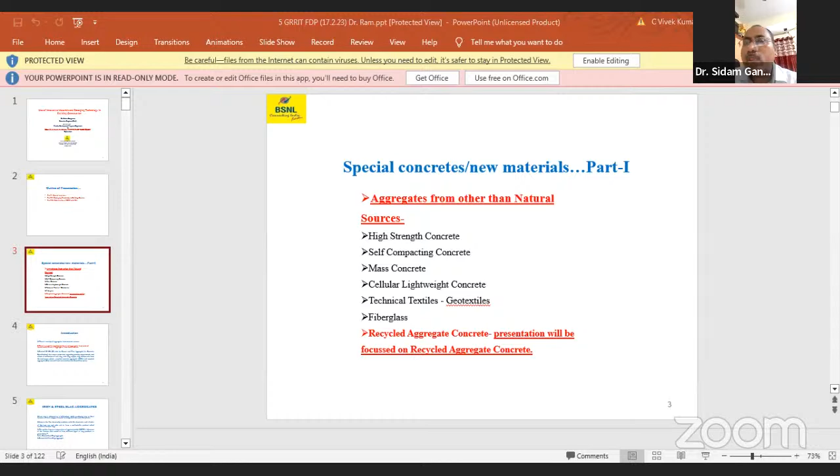Next, about special concretes and new building materials, part 1: aggregate from other than natural sources, high strength concrete, self-compacting concrete, mass concrete, cellular lightweight concrete, technical textiles, geotextiles, and fiberglass. Finally, I am going to focus on recycled aggregate concrete, as I have done research on this topic.

Next, introduction. There is a scarcity of aggregates from natural sources. There is a need to supplement the use of aggregates from natural sources with aggregates from other sources. The revised IS 383 for coarse and fine aggregate concrete also covers provisions regarding quality requirements and extent of utilization of iron slag, steel slag, copper slag, bottom ash from thermal power plants, and especially recycled aggregates sourced from construction and demolition waste.

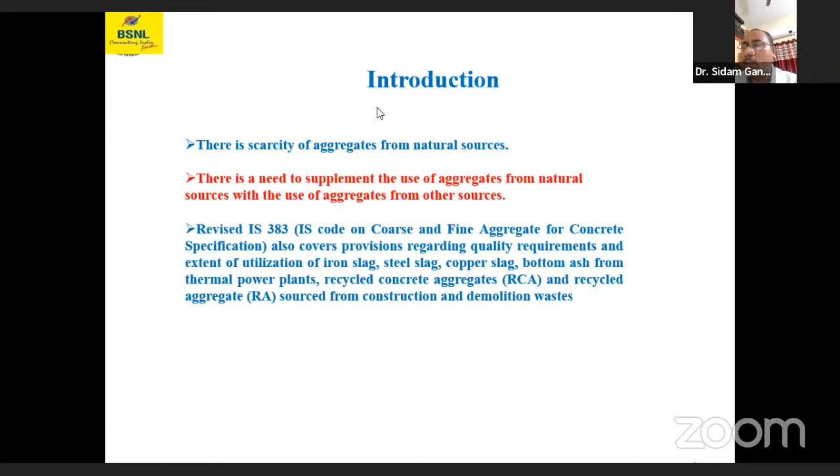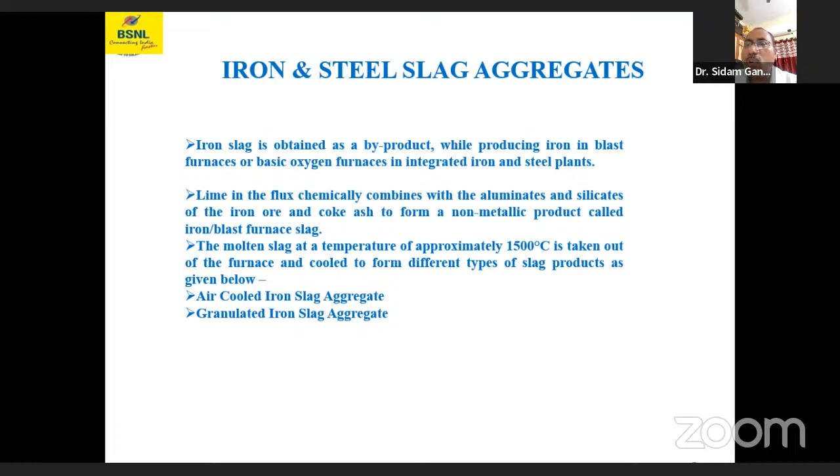Next, iron and steel slag aggregates. The iron and steel slag is obtained as a byproduct while producing iron in blast furnaces or basic oxygen furnaces in integrated iron and steel plants. Lime in the flux chemically combines with aluminates and silicates of iron ore and coke ash to form a non-metallic product called iron or blast furnace slag. The molten slag at approximately 1500 degrees is taken out of the furnace and cooled to form the slag products given below: number one, air-cooled iron slag aggregates, and next, granulated iron slag aggregates.

About steel slag aggregate. Steel slag aggregate is a byproduct of steel making operations in integrated iron and steel plants. Calcined lime used as a flux combines with silicates, aluminates, magnesium and manganese oxides and ferrites to form steel furnace slag. Slag is poured into a cooling yard from the furnace at about 1400 to 1700 degrees Celsius and cooled by air and water. It contains about 10 to 20% metallic iron by mass, to be recovered by magnetic separation. This metal-free slag is then crushed and screened to different sizes for use as required.

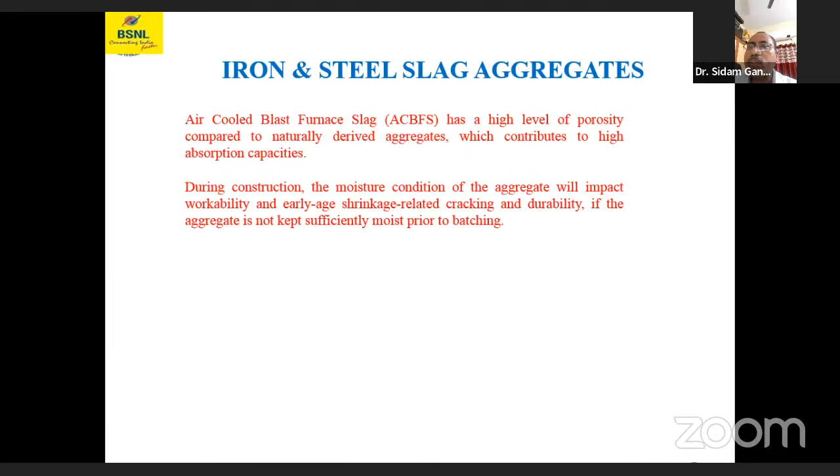Air-cooled blast furnace slag has a high level of porosity compared to naturally derived aggregates, which contributes to high absorption capacities. During construction, the moisture condition of the aggregate will impact workability, early age shrinkage related to cracking, and durability, if the aggregate is not kept sufficiently moist prior to the batching of the concrete.

Next, copper slag as aggregate. Copper slag is produced as a byproduct from a copper smelter in the process of smelting. Iron present in the copper concentrate combines chemically at 1200 degrees Celsius with silica present in the flux materials, such as river sand or silica and quartz fines, to form iron silicate, which is the copper slag. The copper slag thus generated is quenched with water to produce granulated copper slag.

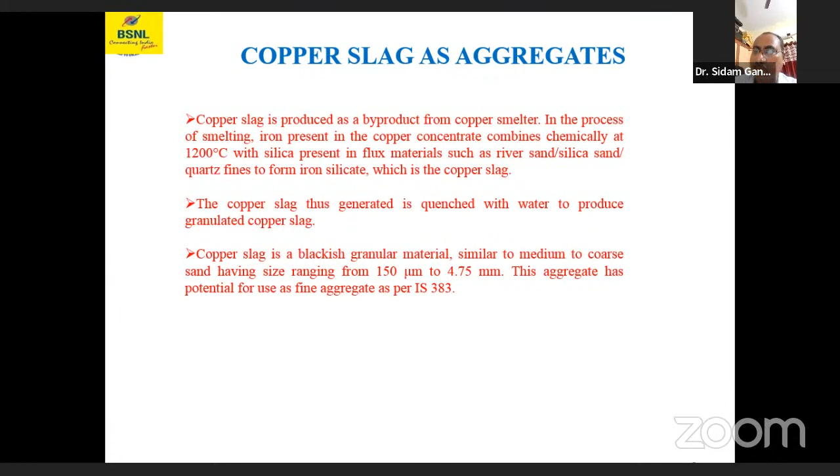Also, copper slag is a blackish granular material similar to medium to coarse sand, having size ranging from 150 micrometers to 4.75 millimeters. This aggregate has potential for use as an aggregate as per the IS 383 codal provisions. Here, the volumetric expansion ratio should not exceed 2% when tested as per IS 383.

Next, unsoundness due to free lime. If the number of particles containing free lime exceeds 1 in 20, then weathering of the slag shall be continued till further testing shows that the level has fallen below 1 in 20.

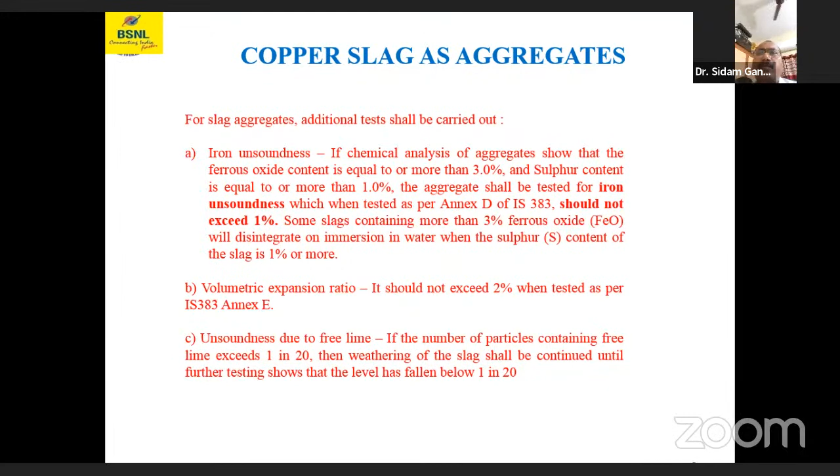Next, extent of utilization. Here, fine and coarse aggregates are there. In coarse aggregate, iron slag, steel slag, recycled concrete aggregate, and recycled aggregate. These are the coarse aggregates. Here, in plain concrete, 50% is allowed, and in reinforced concrete 25%. For lean concrete, we can use up to 100% iron slag.

Whereas for recycled concrete aggregate in coarse aggregate, for plain concrete, up to 25%, and for RCC up to 25 grade, 20% only. For lean concrete, up to M15 grade, 100%. Similarly, for fine aggregate, iron slag, the percentage used for plain concrete is 50%, and similarly for RCC, 25%, and for lean concrete, 100%.

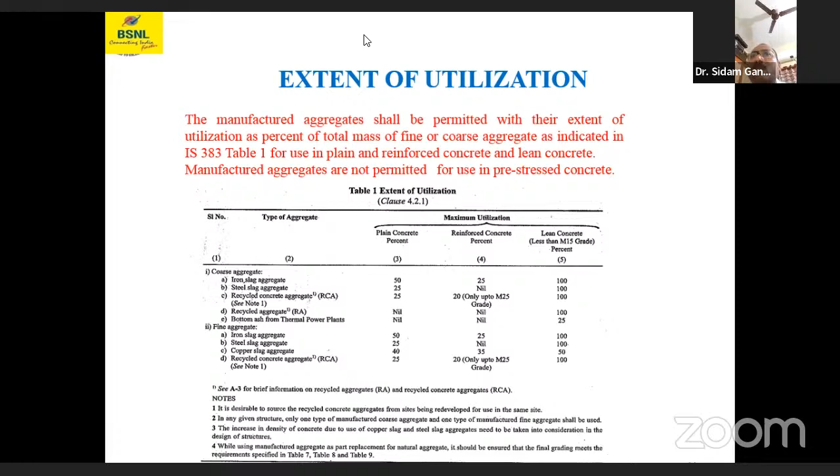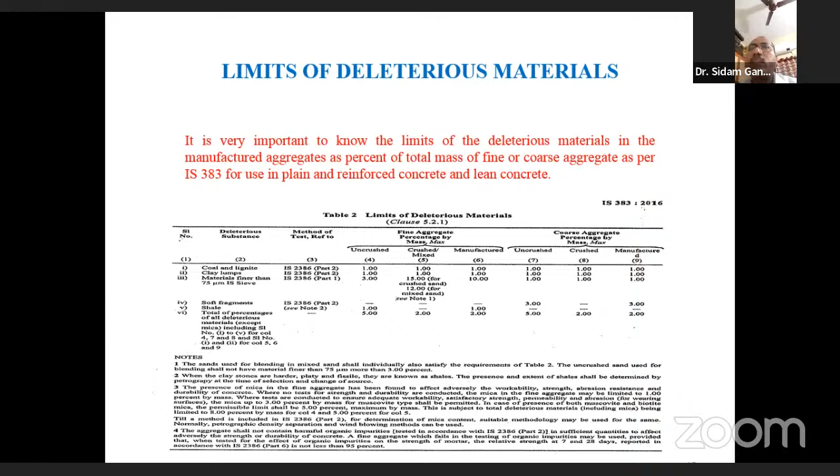So next, about high strength concrete. You all know very well about high strength concrete, but I want to throw some light on it also. High strength concrete is concrete of compressive strength 65 MPa or above. For high strength concrete mixes, specially selected cementitious materials and chemical admixtures, that is superplasticizer, are used, and achieving a lower water-cementitious material ratio is also considered. It is very essential to achieve high strength concrete.

Optimum proportions shall be selected considering the cement and other cementitious material properties, aggregate quality, aggregate gradation, paste volume, admixture type, dosage, and mixing. For any concrete, selection of material is very important. Quality of material is very important. Proper selection of type of cement is also important. Normally 53 grade is used, and fly ash, silica fume, GGBS, or metakaolin are other ingredients in high strength concrete.

Here, fly ash is abundantly available. Silica fume is very costly, so silica fume is used only for specialized structures. GGBS is there. If you substitute GGBS for cement, the RCC or plain concrete structures are very durable. Among all, GGBS is the best supplementary cementitious material for high strength concrete.

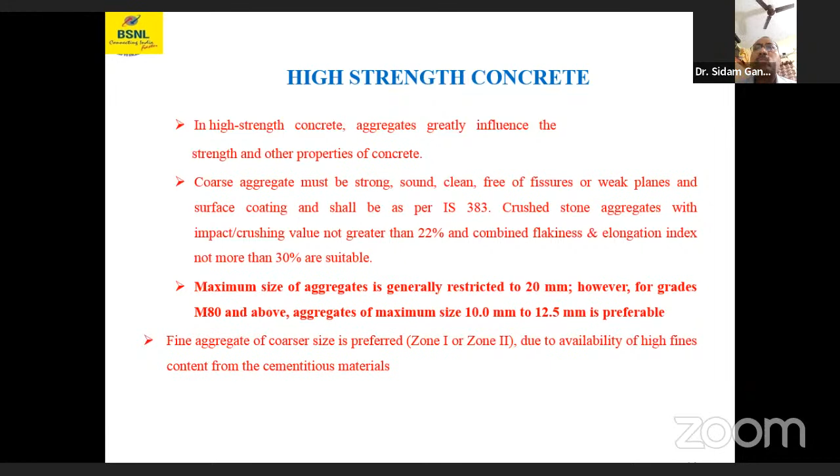Next, the typical dosage of superplasticizer is in the range of 0.5 to 1.5%, and water reduction of 15 to 30% and more can be achieved. The adverse effects in the slump loss, delayed setting time of concrete, and additional air entrapped shall be kept in mind while deciding type and dosage of various admixtures. Sometimes cement admixture incompatibility is experienced. Compatible combinations of cement and SP need to be selected by trials or by simple tests like Marsh cone test.

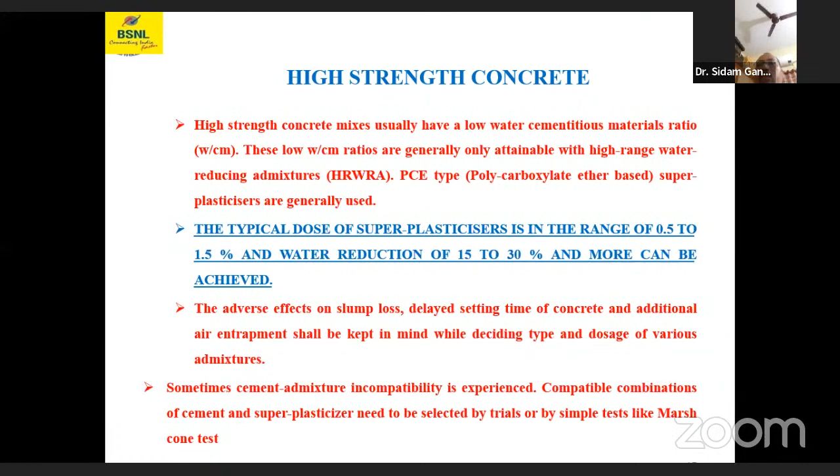Next, about self-compacting concrete. This concrete was innovated in 1988 in Japan by Professor Hajime Okamura. This is widely used in the market. In Hyderabad also, so many skyscrapers are using this self-compacting concrete. Especially in Manikonda, most of the buildings used this self-compacting concrete. Especially Lagadapati's buildings are there, 37 floors. In those buildings SCC was used, and those SCC mix designs were vetted by NIT Warangal.

Self-compacting concrete is a highly flowable, non-segregating concrete that fills uniformly and completely every corner of formwork by its own weight and encapsulates reinforcement without any vibration whilst maintaining homogeneity. SCC is used in both precast and cast-in-situ concrete applications. SCC is used to cast sections with highly congested reinforcement and areas that present restricted access to placement and compaction, construction of tunnel lining sections and the casting of hybrid concrete filled steel tubular columns.

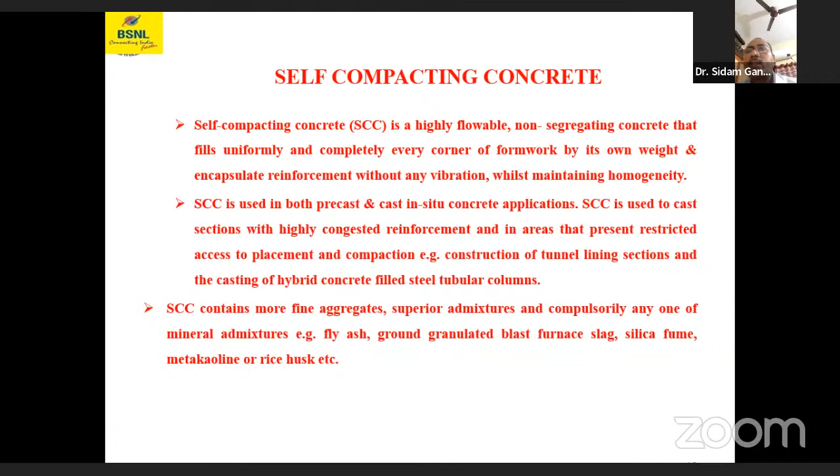SCC contains more fines, superplasticizers, and compulsorily any of the mineral admixtures, that is fly ash, GGBS, silica fume, metakaolin, or rice husk. Fly ash and GGBS are widely used for self-compacting concrete. Generally, from the academic point, if you don't see this self-compacting concrete, we feel that it's something new, but it is equivalent to conventional concrete. We are just adding superplasticizer to improve the flowability. That's all. It is 99.99% equivalent to conventional concrete. We are just adding higher water reducing agents, not more than that.

If you cast cubes, it requires extra time for getting 90% strength. Generally, we test at 7 days and 28 days for the cube test, but it requires an additional 2-3 days. Suppose we want to test the 7 days cube, we have to test those cubes at 10 days. If we require the target strength of 28 days, it requires 2-3 days extra because the use of superplasticizer requires more setting time. So these are the properties.

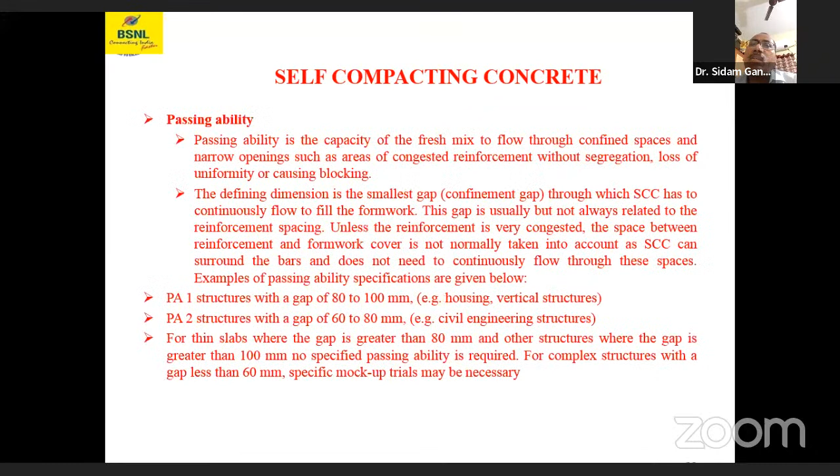M30 and above, cementitious content is 400 to 600. Here I want to mention cementitious content. As per IS 456, the quantity of cement is restricted to only 450. But cementitious content means you can restrict cement to 450, and the remaining 150 you can add as GGBS. That way we also fulfill the codal provisions. Otherwise, for M30, 400 is not advisable. It is very expensive. So when we design the mix, we have to think about the cost of the concrete also.

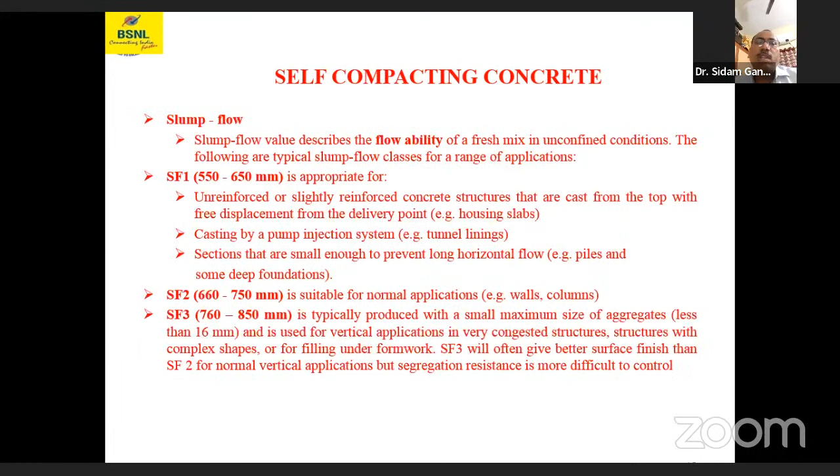Next, this is slump flow 1, 2, 3. These are the codal provisions. Whatever tests we do, those test results have to comply with these codal provisions. This is about self-compacting concrete, passing ability, segregation.

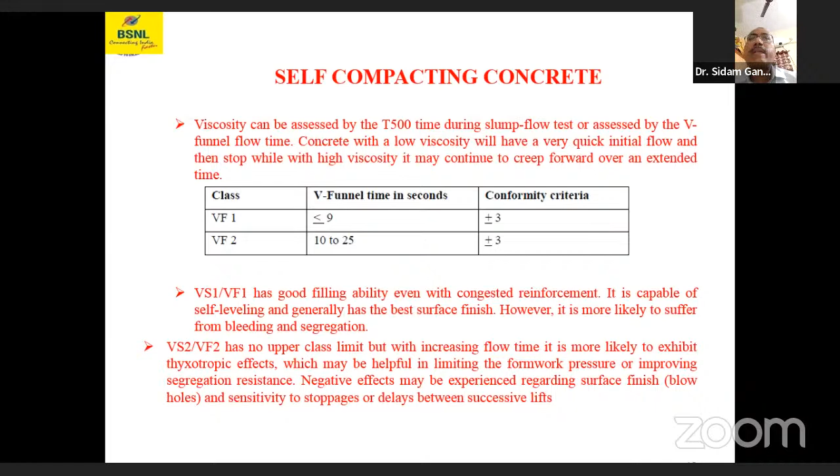Next, mass concrete. Mass concrete is used for structures like dams and other massive structures. Roads also come under mass concrete. For such large structures, measures need to be taken to cope with the generation of heat from hydration of cement and attendant volume change to minimize cracking. The primary objective of proportioning for mass concrete is to establish economical mixes of proper strength, durability, permeability with adequate workability, easy placeability and least temperature rise after placement.

If we do not maintain temperature, cracks will appear immediately after concreting. In mass concrete structures, generally a lower grade of concrete, say M15 or M20, and higher sizes of coarse aggregates are used.

Additional data required for mix proportioning for mass concrete: expected maximum placing temperature, air content range in case of air-entrained concrete, test ages of strength, and so on. In mass concrete, water-reducing admixtures or plasticizing admixtures are effective and usually decrease water content by 5 to 10% at appropriate dosages. The dosage is only 0.5 to 1.5 as per the code 9103.

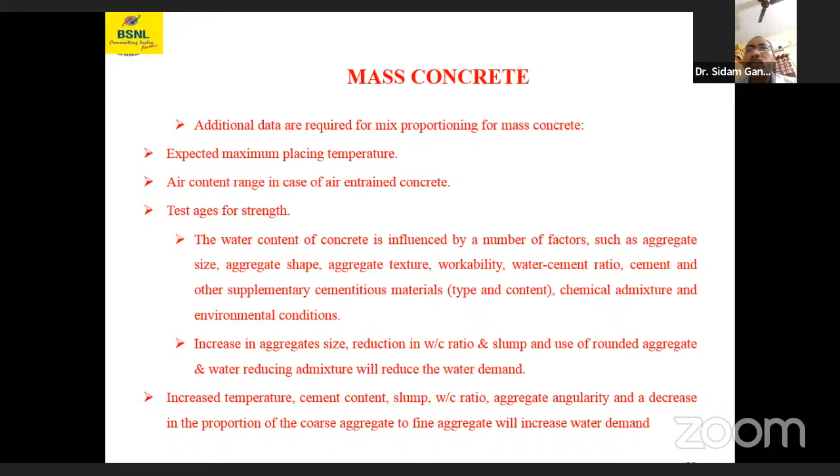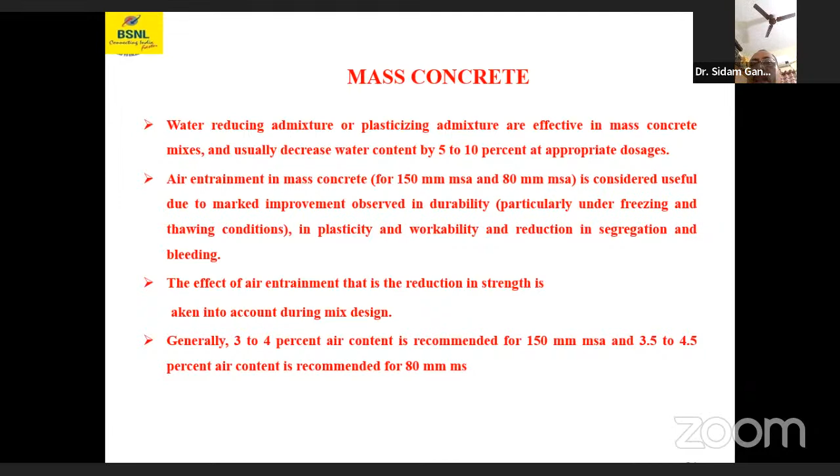Cellular lightweight concrete is a versatile material made up of cement, fly ash, and protein-based foam, mostly used in India for walling purposes as a non-load bearing structural element, which has lower strength than conventional concrete and is popular because of its light weight, which reduces self-weight of the structure. It is a good substitute for ordinary clay bricks, which use high energy and precious agricultural land.

Generally the density of the concrete is in the 22 to 25 range. But for lightweight concrete it is 600 to 1000. There are also micro lightweight concretes, with a density of 300 to 600.

In fly ash based cellular lightweight concrete, the density can be controlled by the introduction of gas or foam by a foam generator. Fly ash can be more than 25%, ranging between 26 to 33% of the solid material constituting CLC mixes for different density outputs. CLC can be produced in a density of 400 to 800 kg per cubic meter with a high insulation value and a 28 days cube crushing strength of up to 275 kg per cm square.

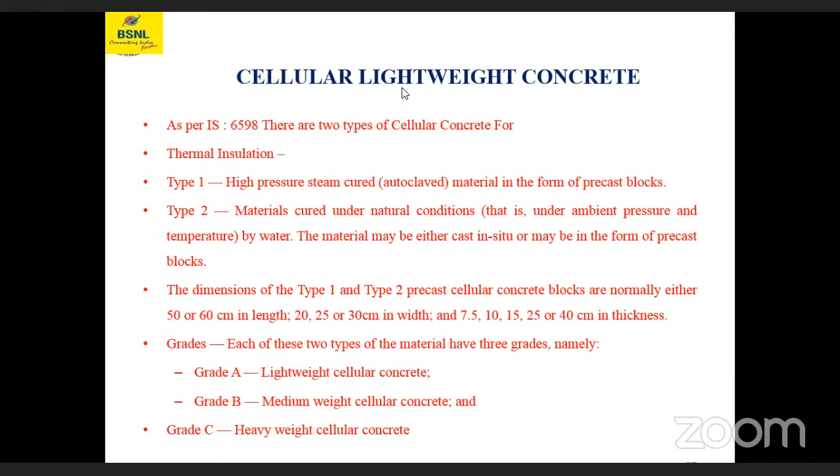It's not visible properly. So about cellular concrete, as per IS 6598, there are two types of cellular concrete for thermal insulation. Type 1, high pressure steam cured autoclaved material in the form of precast blocks. Second, materials cured under natural conditions, that is under ambient pressure and temperature. The dimensions of type 1 and type 2 precast cellular concrete blocks are normally either 50 or 60 centimeter length, 20, 25, 30 centimeter width, and 7.5 or 40 centimeter thickness.

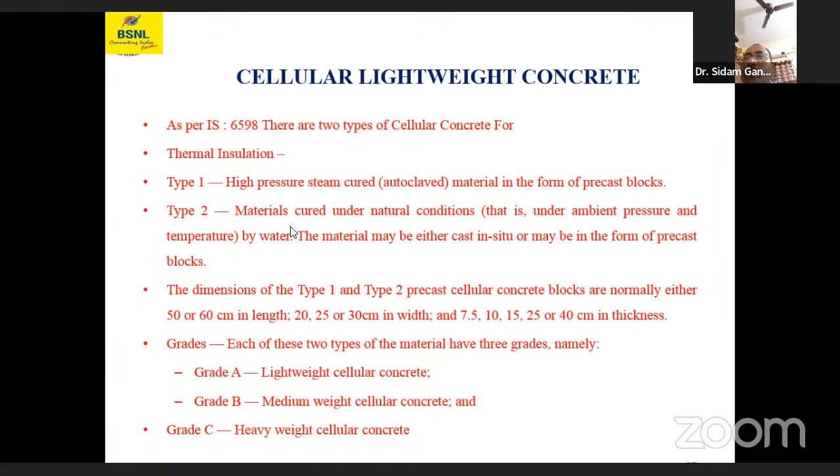In this concrete there are grades: A grade, B grade, and C grade. A grade is lightweight cellular concrete, B grade is medium weight cellular concrete, and grade C is heavyweight cellular concrete. Some requirements of cellular concrete for thermal insulation: density for grade A is up to 320, grade B 321 to 400, grade C 400 to 500. The test reference is IS 5688.

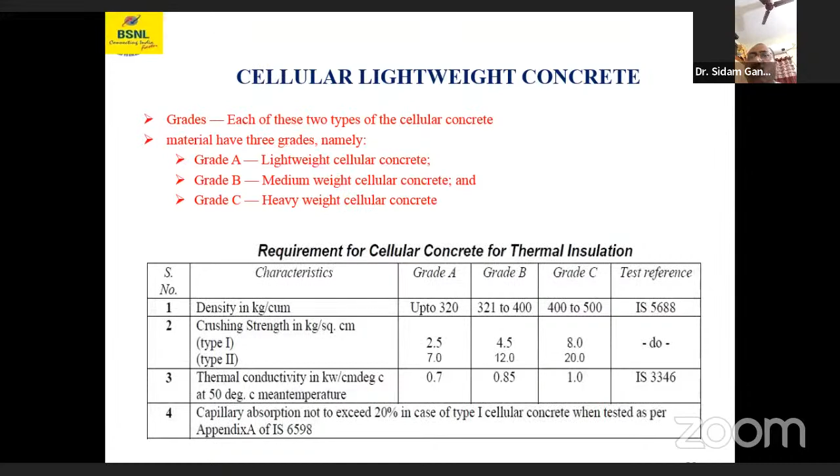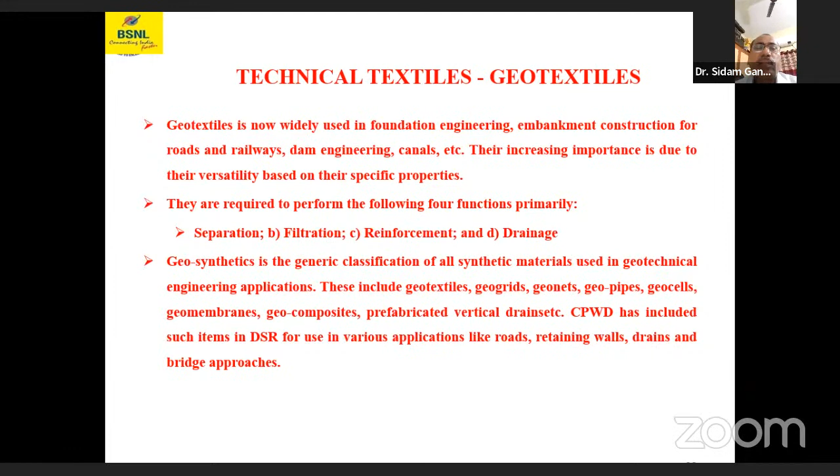So next, fiberglass. Can you change, madam, this up to fiberglass?

Okay. Next, fiberglass is made of extremely fine fibers of glass, formed when thin strands of silica-based or other formulation glass are extruded into many fibers of small diameter suitable for textile processing. Glass fibers are lightweight, having low susceptibility to moisture, high electrical and thermal insulation, mechanical properties, and high impact, corrosion, and fire resistance. Glass fibers can be randomly arranged, flattened into a sheet, or woven into a fabric. Textile glass fibers may be formed from molten glass directly from the furnace.

Glass fibers can be divided into two major groups according to their geometry: continuous fibers used in yarns and textiles, and discontinuous fibers used for insulation or filtration. Fiberglass is a common type of fiber reinforced plastic where glass fibers act as reinforcement. Fiberglass textiles are commonly used as a reinforcement material for molded and laminated plastics, while fiberglass wool made from discontinuous fibers is used for thermal insulation and acoustics.

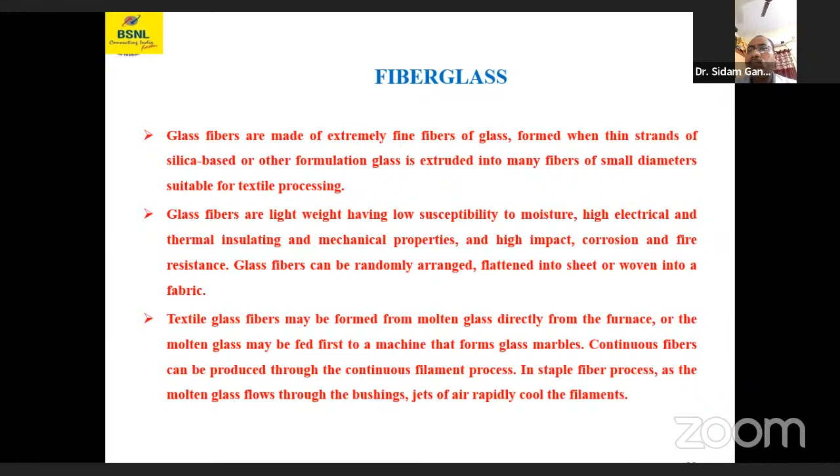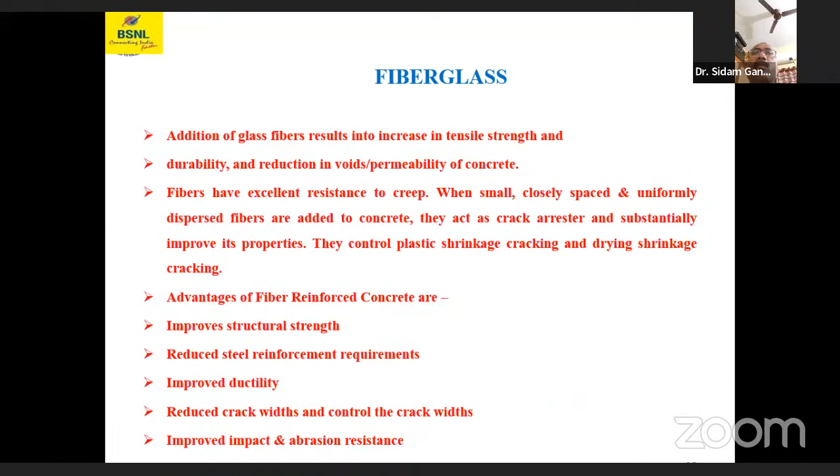Fiber reinforced plastic or glass fiber reinforced plastic are the terms normally used for manufacturing various products. Next, fiberglass reinforcement panel blocks. Next slide, madam. Fiberglass reinforced panel blocks. You can see in the 5-star hotels wherever you go, they construct with fiberglass. They are transparent, almost all.

These fiberglass reinforcement panels are used in walls installed directly on solid surfaces or frames, and ceilings. Glass fiber reinforced gypsum panels are manufactured to a thickness of 124 mm under controlled conditions, to a length of 12 meters and height of 3 meters. It contains cavities that may be unfilled, partially filled or fully filled with reinforced concrete as per structural requirements.

The GFRG panel is manufactured in a semi-automatic plant and dried at a temperature of 275 degrees Celsius. The wall panels can be cut as per dimensions and requirements of the building planned. Some of the advantages of fiberglass reinforcement panels are: GFR panels provide a strong scratch resistant surface, easy to clean with regular detergents, high pressure washers, or steam.

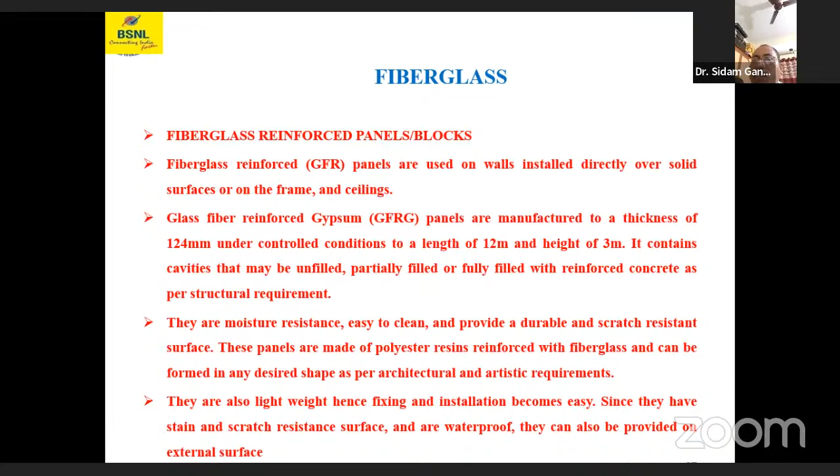GFR panels are lightweight and easy to install. They can be installed with fasteners or frames or even with adhesives. They are waterproof, corrosion free, and have improved chemical resistance. GFR panels can be installed over any existing wall surface or substrate. They have high impact resistance. GFR panels can be manufactured according to required shape and design.

So especially these are preferred. Why? Because GFR panels can replace natural materials, hence are environmentally friendly.

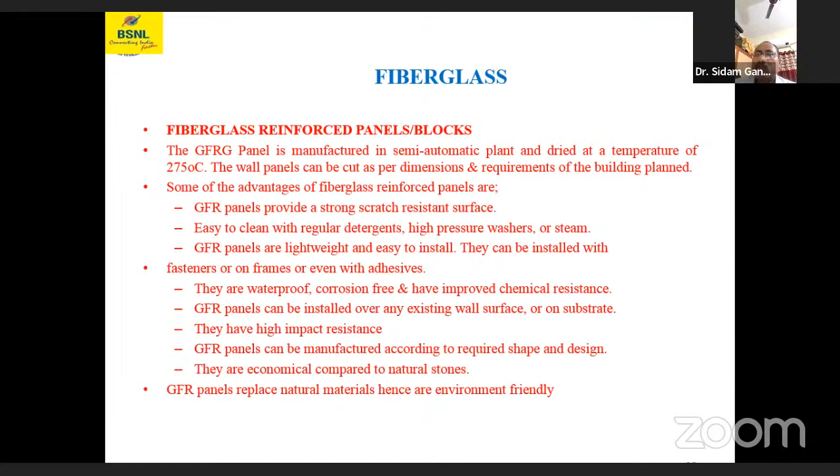So next. Next, madam. Next slide, madam. Next slide, please. Back, madam. Back.

Right, madam. So glass fiber reinforced concrete panels. These panels consist of glass fibers at the rate of 3.5 to 5% by weight, silica, white cement, and admixtures. GFRC panels can be used in the facade instead of natural stone, thus qualifying as a green material. These panels are installed on a facade on hot dipped galvanized MS framework and brackets.

Water repellent coating can be applied on the panels by dipping panels in the required solution to withstand atmospheric conditions. Another advantage of such panels is that they can be manufactured in any shape, including curvilinear surfaces. These panels are also weatherproof and durable, especially in buildings in the coastal area. For domes and sunshades also they are using these fiberglasses. Next, a summary.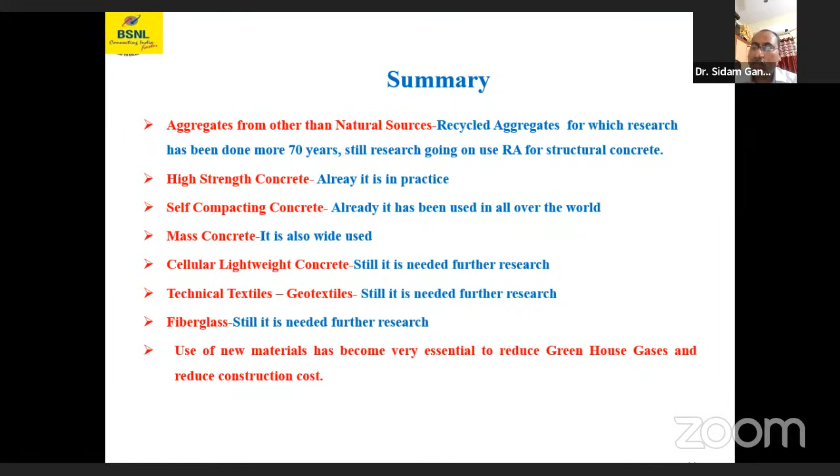So next, part 2, new and emerging technologies in building construction. The outline of this part 2: monolithic concrete construction system using aluminum formwork, monolithic concrete construction system using plastic aluminum formwork, expanded polystyrene core panel system, light gauge steel framed structures system.

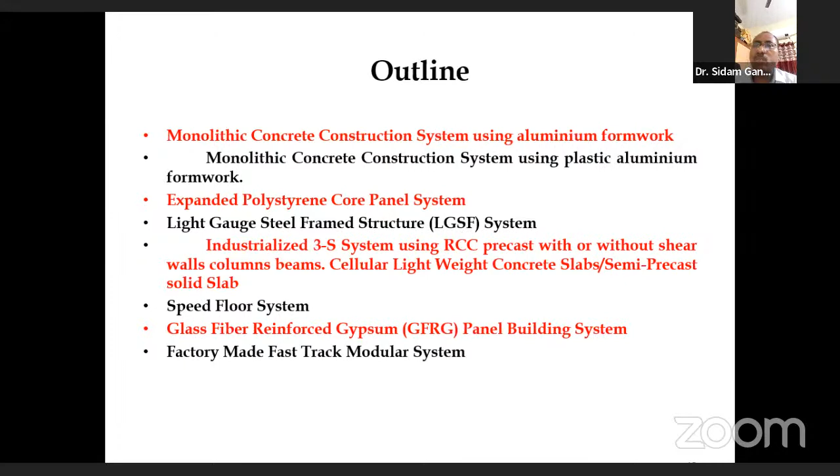Next, industrialized 3S system using RCC precast with or without shear walls and column beams, cellular lightweight concrete slab or semi precast solid slab, speed floor system, glass fiber reinforced gypsum panel building system, factory made fast track modular system. This is the outline of the presentation. It's the introduction for part 2.

CPWD has recommended adoption of new technologies in construction, as these will result in the following benefits: significant reduction in air and noise pollution and construction waste, optimum usage of water, no use of timber or plywood for shuttering, form finish elements, good workmanship or quality and durable construction, increased labor productivity due to working in a controlled environment, all weather site construction, so all the seasons, cost saving due to compressed completion time and rental cost reduction, better site organization and utilization of resources.

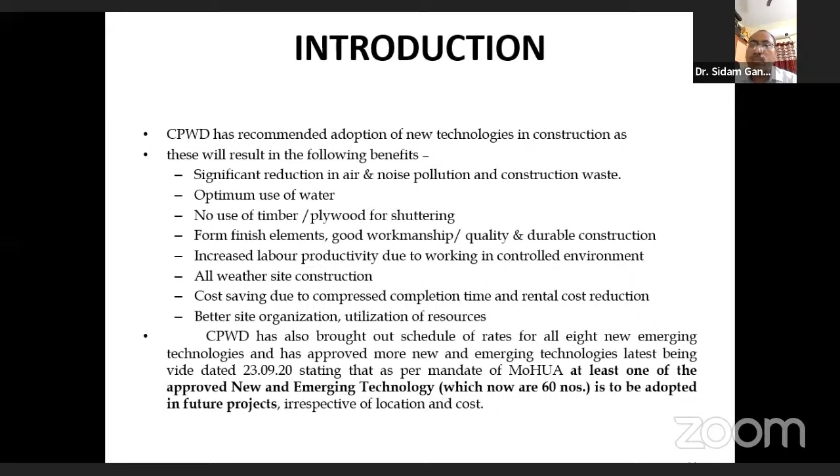CPWD has also brought out schedule of rates for all 8 new emerging technologies and has approved more new emerging technologies, the latest dated 23 in the year 2020, stating that as per the mandate of the Ministry of Housing and Urban Affairs, at least one of the approved new and emerging technologies, which now number 60, is to be adopted in future projects, irrespective of location and cost.

This is about monolithic concrete construction system using aluminum formwork. Conventionally, we use wooden formwork, which we used in the olden days, but nowadays it is very difficult to get the wood and it is very costly, and forest authorities also will not give permission to take out the wood.

To replace the conventional steel or plywood shuttering system with customized engineered formwork manufactured in the factory setup under controlled conditions. Custom designed modular formwork made up of aluminum plastic composite is used for this purpose, which facilitates easy handling with minimum labor and without use of any equipment.

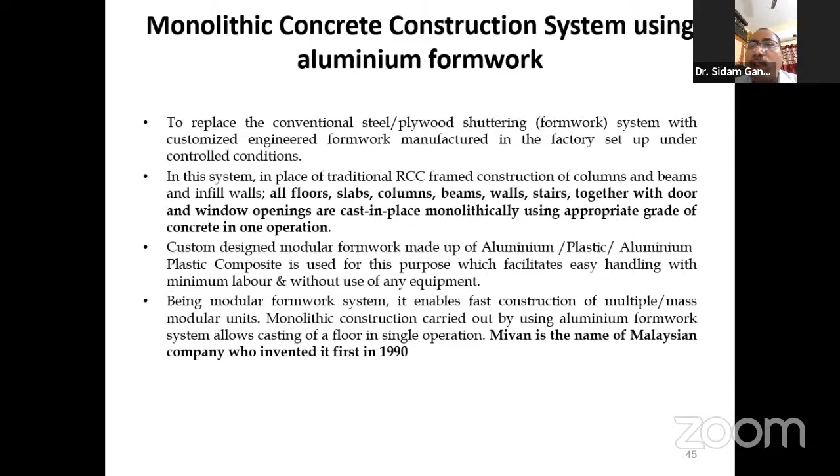Being a modular formwork system, it enables fast construction of multiple and mass modular units. Monolithic construction carried out by using aluminum formwork system allows casting of floor in a single operation. MIVAN is the name of the Malaysian company who invented it in 1990.

So this is the aluminum formwork. Directly we can pour the concrete from the upper side. That is very easy. Around 100 houses also we can cast in one day if we plan in advance.

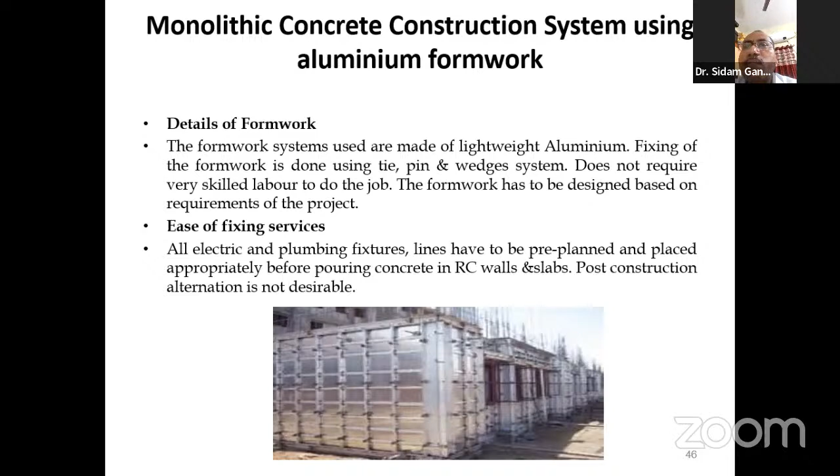So the structural requirement of construction is suitable for low to high rise structures. The monolithic RCC construction is a shear wall system. The maximum spacing between cross walls is limited to 1.5 times the floor height if supported on 2 edges, and 2 times the floor height when supported on all 4 edges.

The walls are designed for vertical loading and also for in-plane lateral load, shear, and out of plane bending due to wind load or earthquake forces as per IS 875. For out of the plane loading, the plate can be assumed to be supported by floor or slab diaphragm and cross walls, and continuity can be assumed.

Thickness of the wall is generally 100 mm with centrally placed reinforcement. Therefore, adequate cover is maintained and high durability is achieved. So this is very economic and has so many advantages.

Next, monolithic concrete construction using plastic aluminum formwork. To replace the conventional steel plywood shuttering, in place of traditional RC frame construction, all floors, slabs, columns, beams, walls, stairs together with door and window openings are cast in place monolithically in one operation. This is very easy and faster construction.

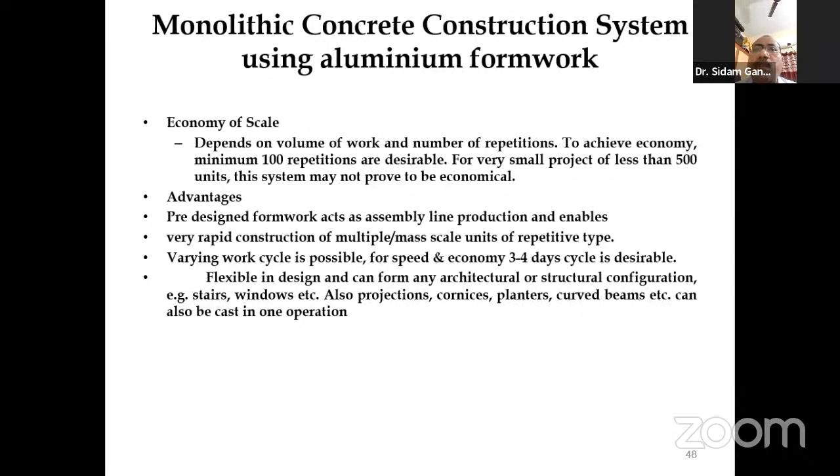So the limitations here: however, a lead time of about 3 months is required for start of the work, as the formworks are custom designed and manufactured. A prototype needs to be approved before manufacturing. Also, a number of sets of formworks are required.

Capital cost to initiate construction is high and may require regular flow of funds. Post-construction alterations are difficult. All the service lines are to be pre-planned in advance. Not much saving in construction in one storey or such small structures. This is advisable for massive construction only, and is not recommended for one or two buildings, like G+1 or G+2.

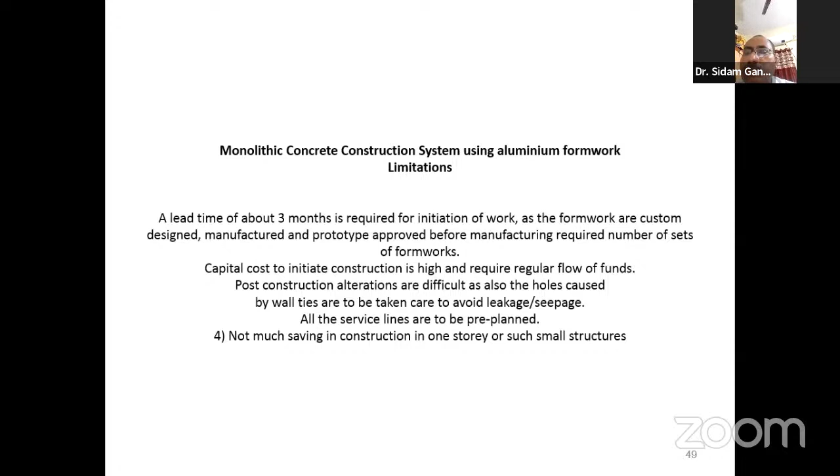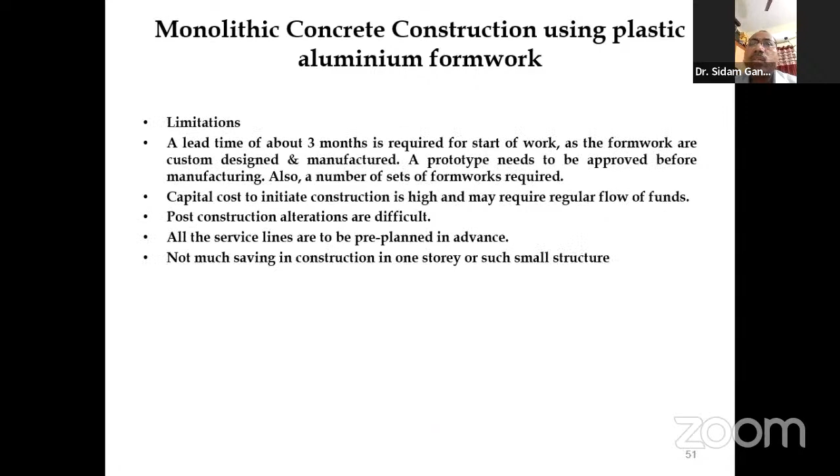Next, expanded polystyrene core panel system.

So, expanded polystyrene core panel system is based on factory-made panels. It consists of self-extinguishing expanded polystyrene sheet, corrugated, with minimum density of 15 kg per cubic meter, thickness not less than 60 mm, sandwiched between two engineered sheets of welded wire fabric mesh made up of high strength galvanized wire of 2.5 mm to 3 mm dia.

A 3 mm to 4 mm dia galvanized steel truss wire is pierced completely through the polystyrene core at offset angles for superior strength and welded to each of the outer layer sheets of the steel welded wire fabric mesh. The panels are finished at the site using minimum 30 mm thick shotcrete of cement and coarse sand in the ratio of 1:4, applied under pressure. The shotcrete coat encases the EPS core with centrally placed steel welded wire fabric mesh.

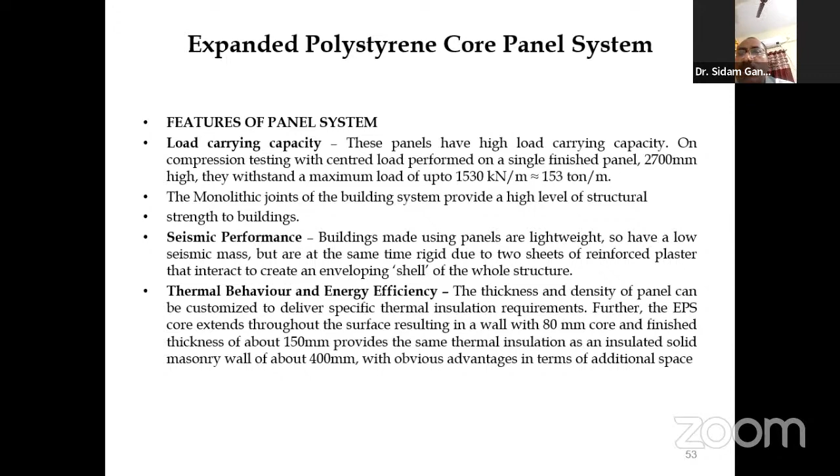Next, features of the panel system: load carrying capacity, seismic performance, thermal behavior and energy efficiency. So here, seismic performance: the prototype houses tested for seismic loading came through unscathed. Buildings made using panels are particularly lightweight, so have a low seismic mass, but are at the same time rigid due to two sheets of reinforced plaster that interact to create an enveloping shell of the whole structure.

The thermal behavior and energy efficiency: the thickness and density of the panel can be customized to deliver specific thermal insulation requirements. Further, the EPS core extends throughout the surface, resulting in a wall with 80 mm core and finished thickness about 150 mm, which provides the same thermal insulation as an insulated solid masonry wall of about 400 mm, with obvious advantages in terms of additional space.

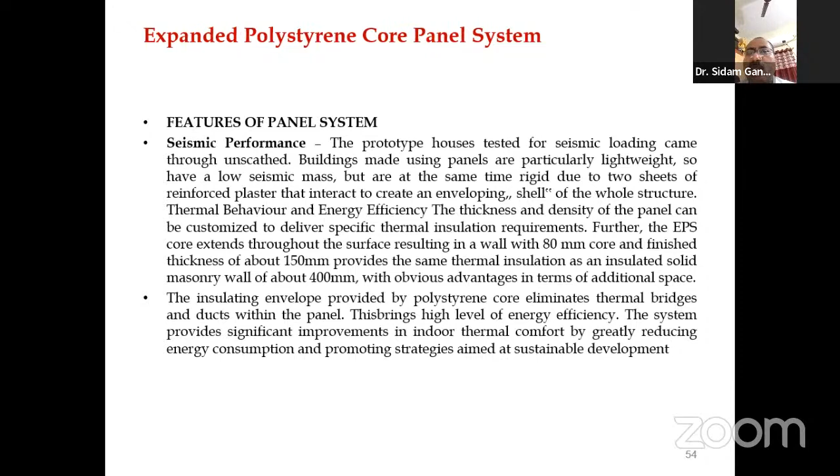These are the advantages: fire resistance, good acoustic properties, rapid installation and cost effectiveness, lightness, ease of transport and handling, versatility and a complete range of building elements, blast resistance and cyclone resistance, and a wide choice of finishes.

Requirements for setting up a plant. Next.

Light gauge steel framed structure system. LGSF is based on factory made galvanized light gauge steel components. It is typically suitable for low rise to medium rise structures, 1 to 3 story high residential and commercial buildings. The system is produced by cold forming method and assembled as panels at site, forming structural steel framework for a building of varying sizes of wall and floors.

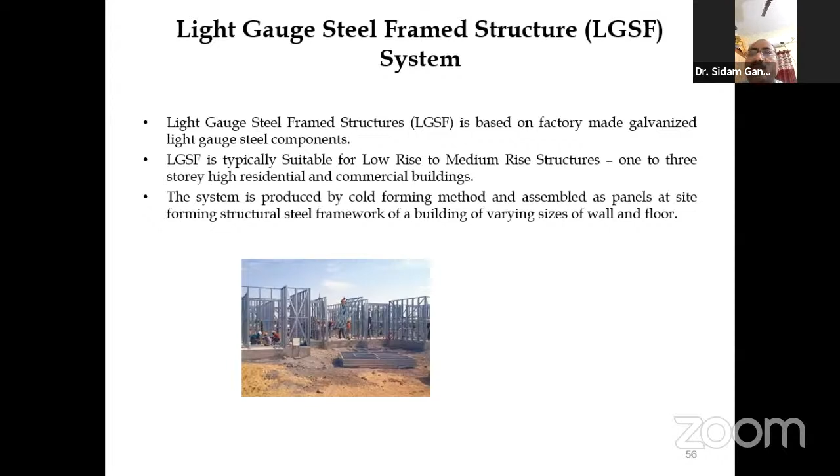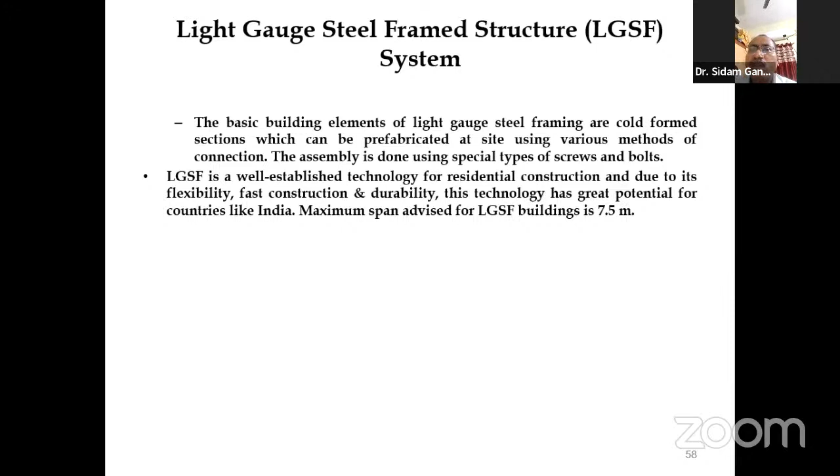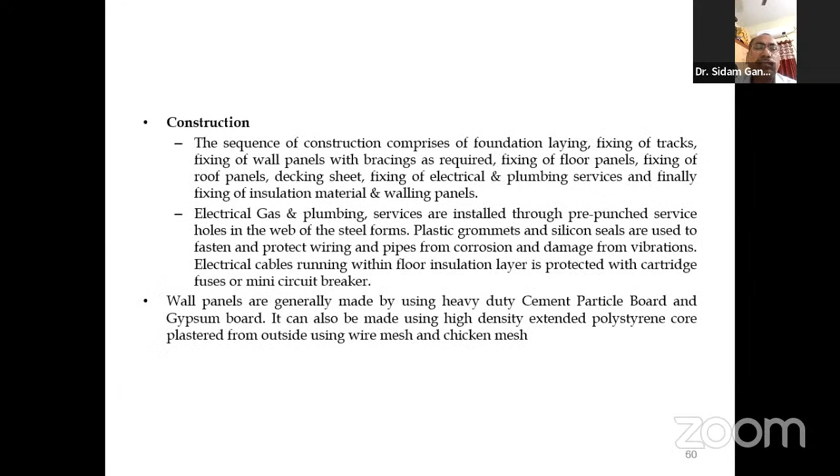Next, advantages. Light gauge steel LGSF is based on an established system of light gauge steel structures and designed as per the Indian standards.

With provisions for loading. The advantages of the system are high precision, fully integrated computerized system with CNC machine that provides very high degree of accuracy up to 1 mm, good structural behavior, high strength to weight ratio due to low weight, significant reduction in design earthquake forces, and marginal chances of progressive collapse due to highly ductile and load carrying nature of closely spaced stud joints.

Speed in construction is very high. A typical 4-story building can be constructed within 1 month.

Saving in foundation, the structure being light does not require heavy foundation. Mobility, structural elements can be transported to any place including hilly and remote areas easily, and the structure can be erected within a short time. This is very environment friendly.

Steel used can be recycled when required. The structure can be shifted from one location to another without wastage of materials. So this is the system.

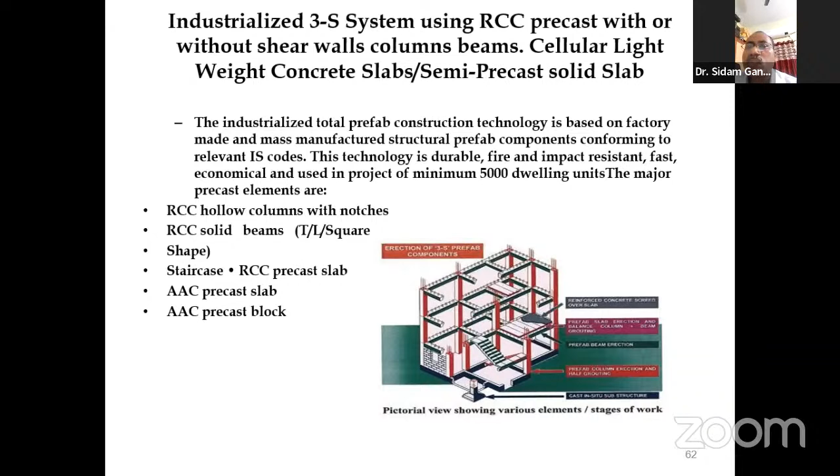Next, in this system, precast dense concrete hollow column shells of appropriate size are used in combination with precast dense concrete rectangular T or L shape beams, with lightweight reinforced autoclaved cellular concrete precast RC slabs for floors and roofs.

Hollow columns are grouted with appropriate grade of in situ concrete. All other components and jointing of various structures are accomplished through on-site concreting along with secured embedded reinforcement of appropriate size and length, to ensure monolithic continuous resilient, ductile and durable behavior.

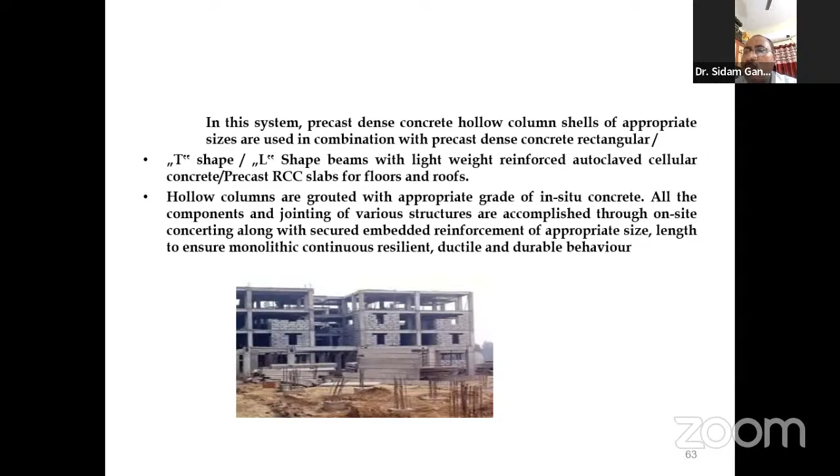Some essential requirements. Next, limitations.

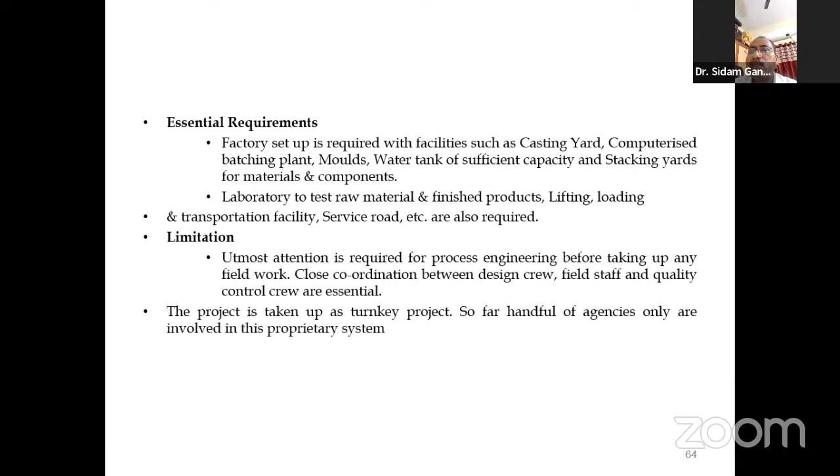Next, speed floor system. In this system, speed floor is a composite floor system using both steel and concrete. It is suitable for low rise to high rise structures. It is a durable, speedy and economical suspended concrete flooring system using a roll formed steel joist as an integral part of the final concrete and steel composite floor.

It is suitable for use in all types of constructions. It is essentially a hybrid concrete or steel T-beam in one direction and an integrated continuous one-way slab in the other direction.

In the speed floor composite floor system, floor joists are designed and custom manufactured from pre-galvanized high tensile steel in a one pass roll former, where it is roll formed, punched, pressed, and slotted in a fully computerized machine to suit particular job conditions. The joist depth and concrete thickness are varied depending on the span, imposed loads, and other functional considerations.

Is this the time, madam? Hello? Hello, madam? Sir, madam, what is my time left? No problem sir, 10 more minutes, continue. 10 more minutes, sir. I will take 10 or 15 minutes, no problem sir. Take your own time, no problem, so I will skip some parts sir. No problem sir, continue, take your own time. Because I am presenting from my mobile, sir, it is very difficult. Sorry, okay sir, it is not understood properly, please continue sir, please continue, okay okay sir.

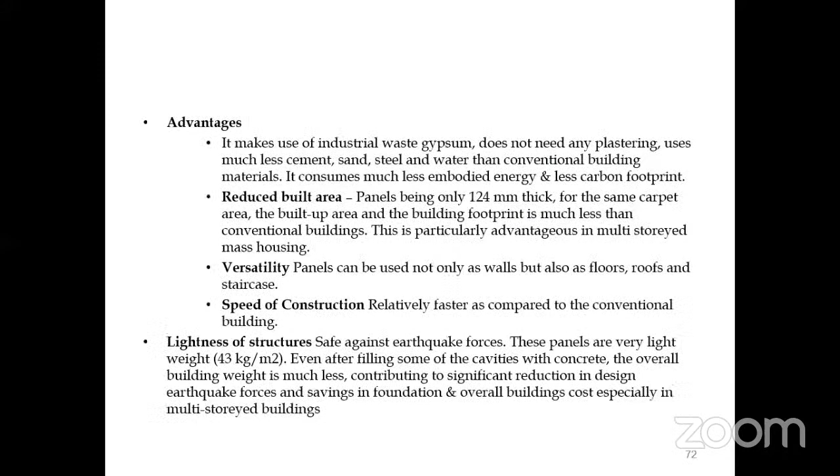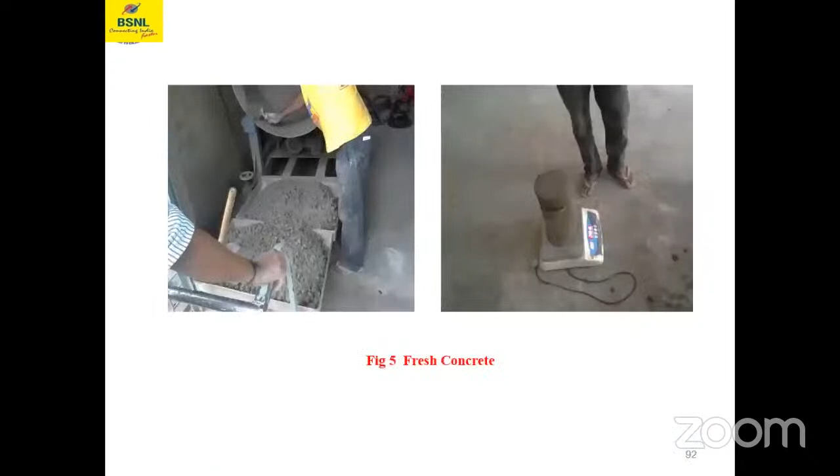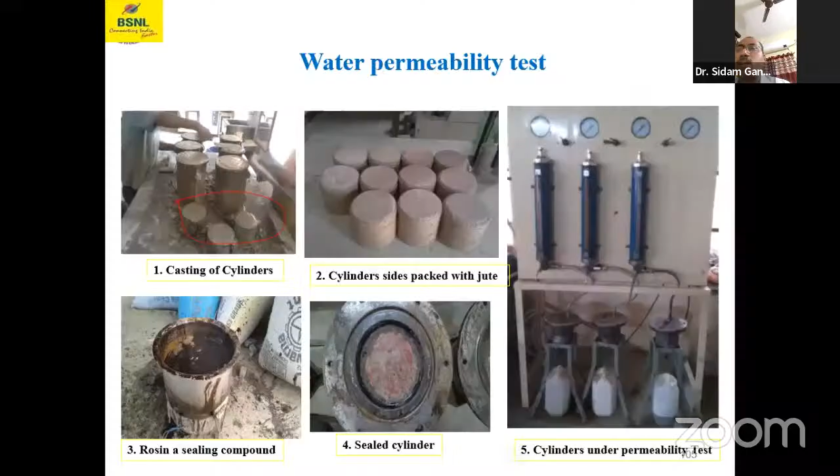Part 3, madam. Part 3. Use of secondary cementitious materials and substitution. Sir, is there a slide number? 76, sir. Okay, sir. Yes.

As part of my presentation in this faculty development program, this is part 3: use of secondary cementitious materials and substitution of natural aggregates with recycled aggregate.

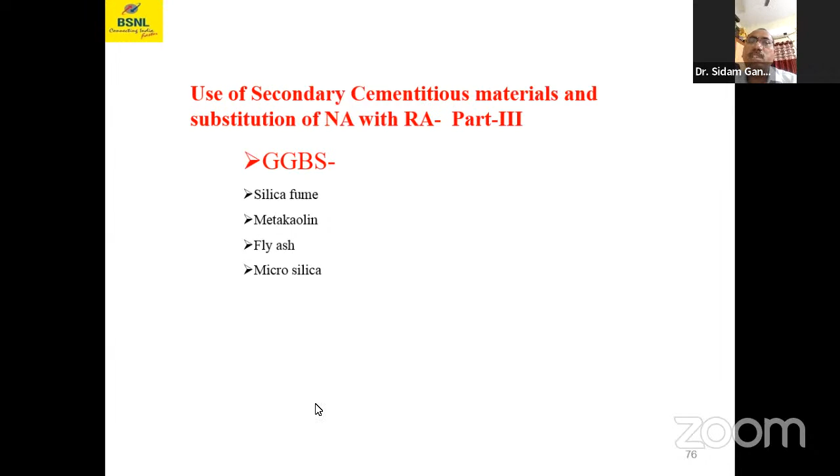Secondary cementitious materials are GGBS, silica fume, metakaolin, fly ash, microsilica, and so many others. But here I am focusing on substitution of GGBS and recycled aggregate - strength and durability by substituting secondary cementitious material and conventional aggregate with recycled aggregates.

Due to continuous bombarding during World War II, the cities became heaps of demolition waste. After World War II, an idea was conceived to recycle and utilize the demolished waste as recycled aggregate. Since then, research has continuously been going on to utilize C&D waste by recycling.

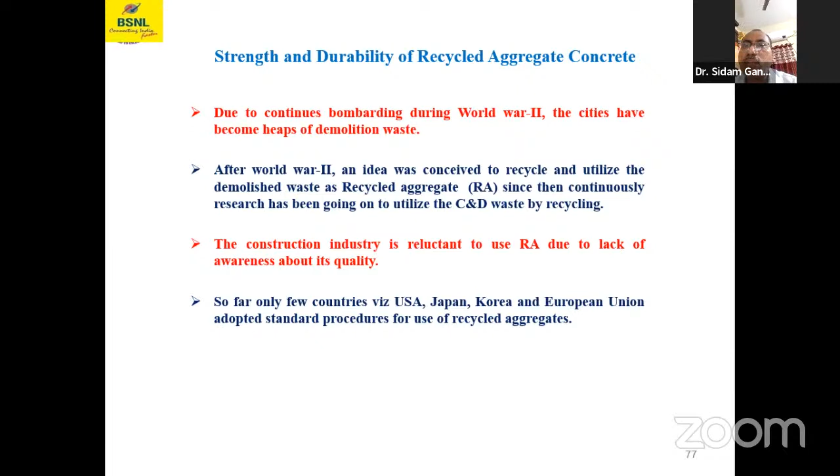The construction industry is reluctant to use recycled aggregate due to lack of awareness about its quality. But so far, some countries like USA, Japan, Korea, and the European Union have adopted standard procedures for use of recycled aggregates.

About construction and demolition waste: the construction industry consumes natural resources massively and also produces enormous construction and demolition waste. Concrete rubble is the major problem portion, about 40% of C&D waste, which poses a disposal problem.

Natural coarse aggregates are scarce and depleting at a faster rate due to increased construction activities. The problem of C&D waste can be resolved by using concrete rubble as recycled aggregate in the concrete.

Effect of processing techniques on recycled aggregate: there are many processing techniques which have severe impact for production of recycled aggregate, for example, two-stage mixing method, washing with acids, preheating treatment, etc. It is practically difficult to adopt these techniques for production of RA.

In general practice, we always recommend that recycled aggregate material should be friendly to the common man, but whatever research is going on is not friendly. For example, the two-stage mixing method.

This method was introduced by Singapore University - the two-stage mixing method - but in practice it is very difficult.

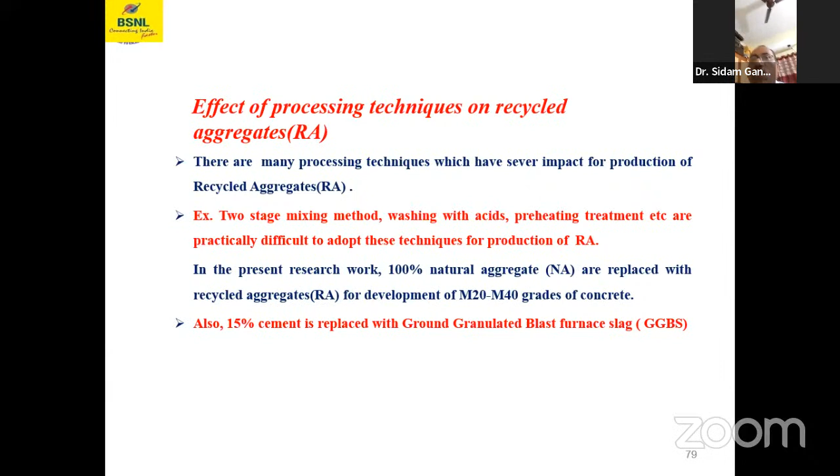In my research work, the following steps were conducted: mix design, slump test, compressive strength test, splitting tensile strength, flexural strength, modulus of elasticity, water permeability test, and acid, sulfate, and chloride attack assessment of test results for 1 year.

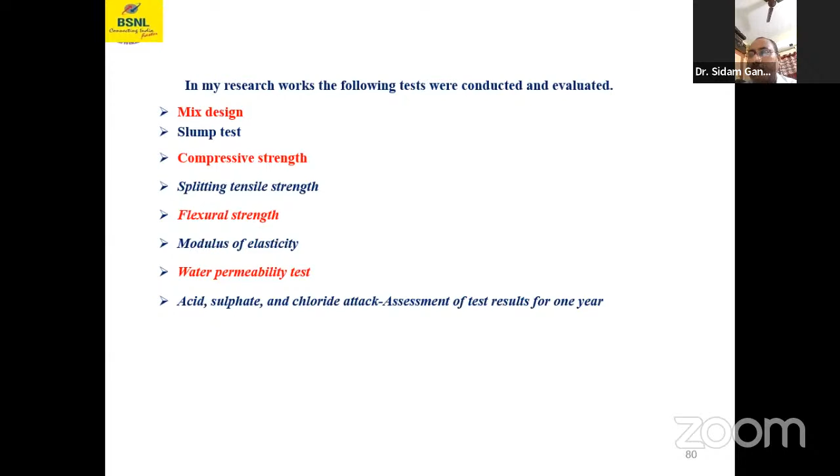There is a need for new or sustainable materials to conserve natural resources, to resolve environmental issues, to reduce construction cost, and to save landfill space.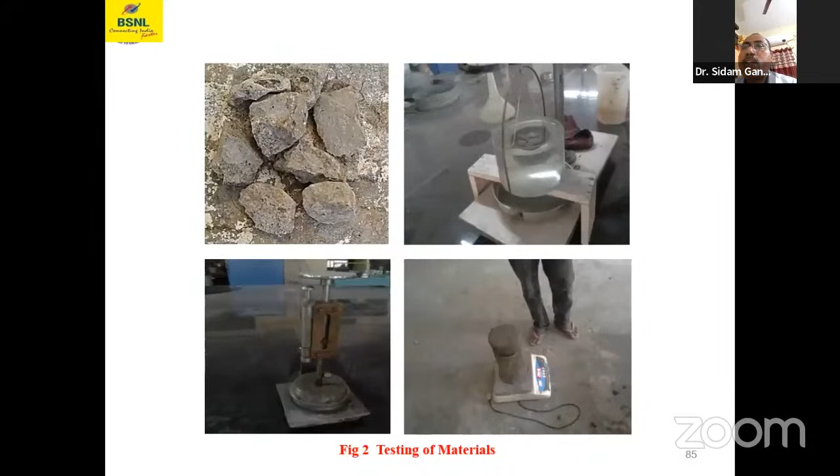Next, the method for extracting recycled aggregates. Previously we studied two-stage mixing, but here there is only a single stage in my research - just collection of C&D waste from any demolished building in Hyderabad, wherever the city. If it is near the proposed site, we collect the C&D waste, separate construction and demolition waste, and break it into 10 centimeter size.

We don't need to wash it, just pour water to remove dust particles from the C&D waste. After pouring water on the aggregates, we leave them for a minimum of 7 days because they absorb water due to the attached mortar.

Next, testing of aggregates in accordance with the relevant IS codes, and then the recycled aggregate is ready to use - generally similar to our conventional, natural aggregates.

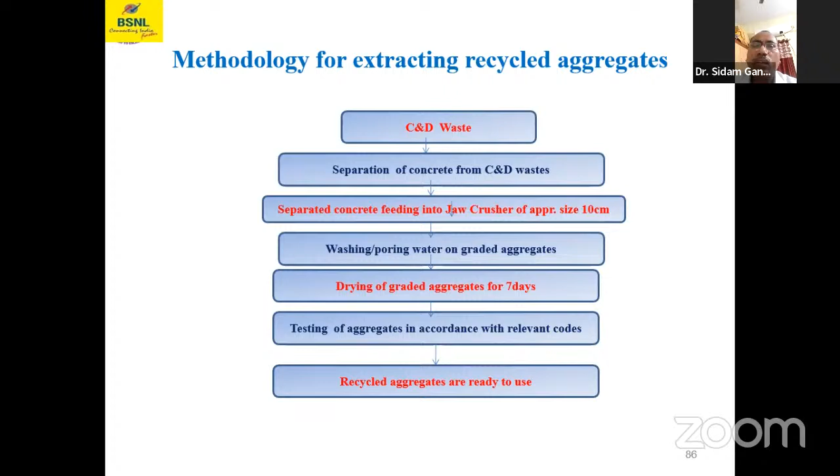This crushing machine is available in Osmania University. Please, madam, show this crushing machine - it is available there, and I extracted this recycled aggregate using this machine.

During my research work, I extracted more material than I required. Whatever recycled aggregate was available, I gave to MTech and BTech students of Gokaraju Rangaraju for their experiments.

So this is from 2011. But can I know how many such plants are there? Can anybody tell me? Is there any such plant in Hyderabad? From the audience, please - participants?

In 2010, there was not a single recycling plant, but now in Hyderabad, 4 recycling plants are available. Just if we make one phone call, immediately they will come and collect the C&D waste.

So this is the detailed experimental program: finalization of mix design and to obtain mechanical characteristics. Next, durability studies on recycled aggregate concrete. Next, validation of theoretical studies by conducting experimental work. In this presentation, I am not explaining the validation of theoretical studies by conducting experimental work because it requires more time. So these are my trial mixes.

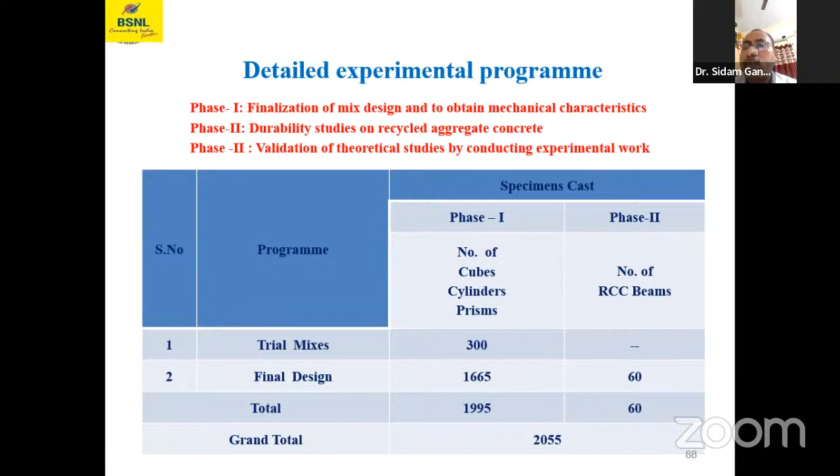Next, concrete mix design methodology. In my present investigation, I have taken M20 to M40 grade of concrete using 100% recycled aggregate, including replacement of 0%, 10%, and 15% cement with GGBS, designed as per IS 10262 only.

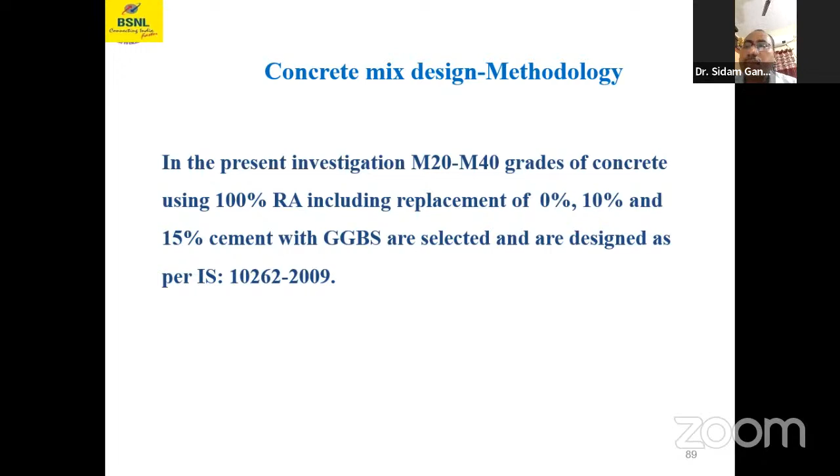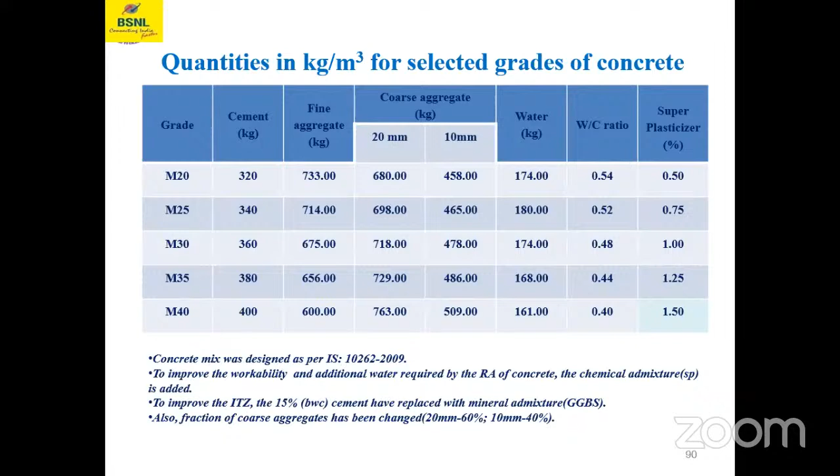Time is there, sir? 5 minutes, sir? Yes, sir. Please go ahead. Okay, sir. 5 minutes you take, sir.

So here I want to tell you something in this figure. All mixes achieved the target slump at 15% GGBS. So what are the slump values of plain concrete, mass concrete and ordinary RCC? Participants, can you tell? I am questioning you. What is the slump value for plain concrete? We continuously do the slump test, but what are the specific values? Mass concrete, or RCC for ordinary buildings?

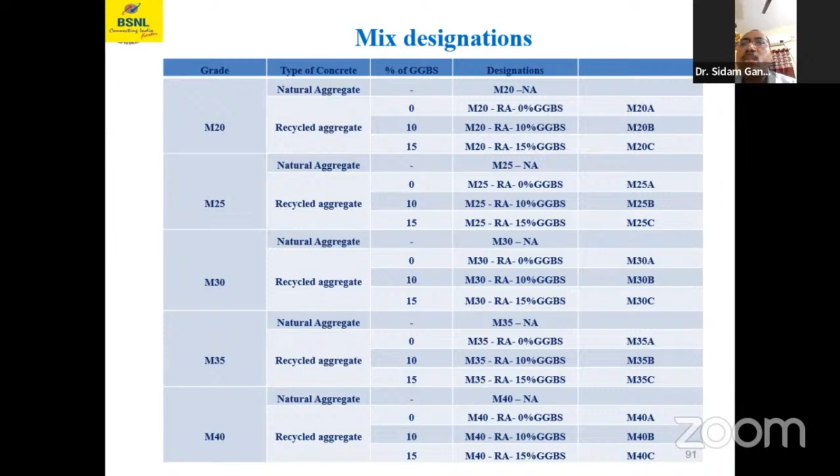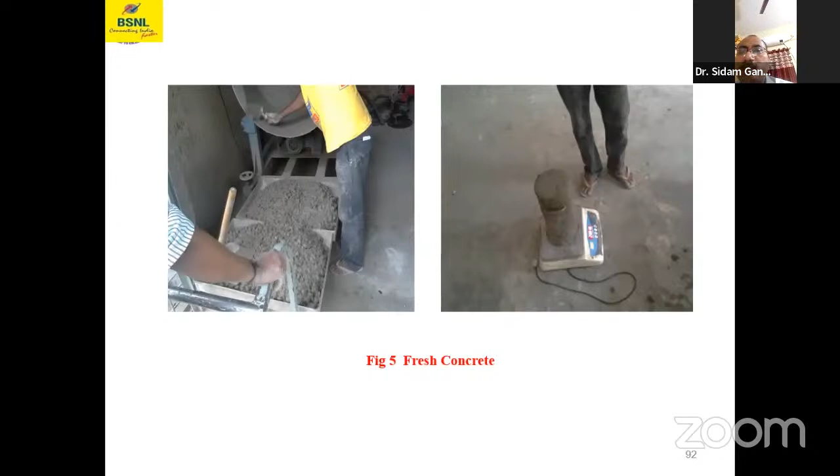Next, comparison of test results of compressive strength. So I have compared my test results of compressive strength. Participants, I am asking one question: what is the percentage of compressive strength at 7 days? Why do you conduct the test at 7 days? Can anybody answer this? Srinivas sir.

Sir, to test the early strength, we do the 3rd day and 7th day tests, to assess whether the early strengths are achieved or not. Sir, what? 3rd day, 7 days. Generally, it is habitual to test on the 28th day, but to check whether it is achieving early strengths, we test on the 3rd and 7th day.

But practically, is it correct, sir? Can you correlate this to industry? Yes, construction, 100%, sir. For example, where road repair works are there, it is required to get early strengths, so it is mandated to get the strength on the 7th day also. A feature of high strength and high performance concrete is that it should get early strengths. Generally, sir, I don't recommend 3 days strength. I recommend 7 days and 28 days only.

Why? Because for faster construction, we test at 7 days. Practically, at construction sites we cast 6 cubes, sir. At 7 days, we send 3 cubes to the lab. Okay, sir. Whatever you are doing at site, but theoretically, from the laboratory point of view, 3 days and 7 days are mandatory, sir. No, sir. 3 days is not mandatory. 7 and 28 days, generally.

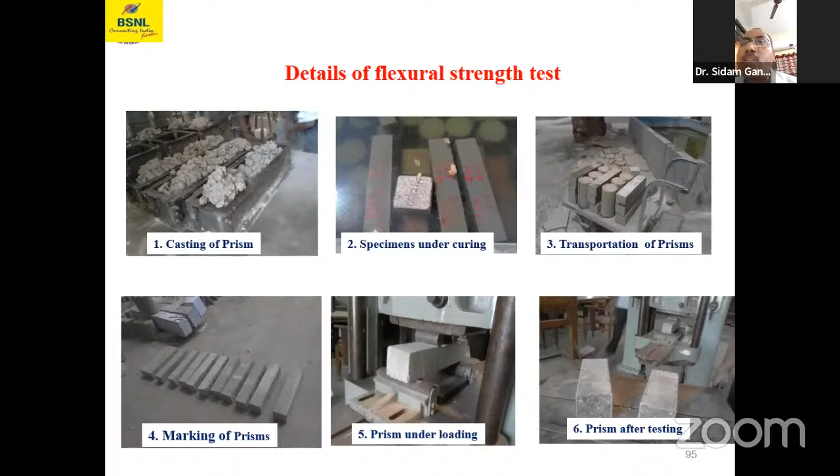Discussing question answers. No, sir, this is an interactive session. At last, I cannot come back to this slide. That is okay, sir, at the end you can ask. To study the effect of aggressive chemical environment of acid attack, compressive strength loss. Next slide, madam. Durability studies.

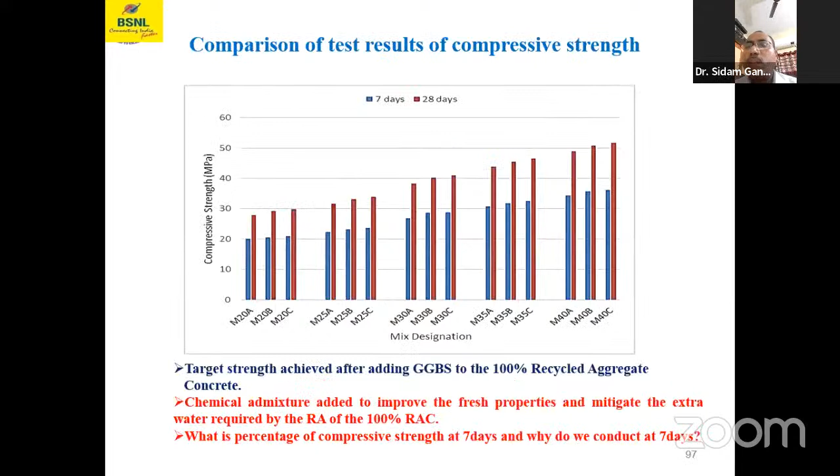Sir, kindly interact, otherwise it will become one way. See, no shortage of time, sir. Already it is late, shortage of time, that is the problem. Okay, sir. Continue, please. So many slides are there, it requires more time. Okay, sir, I will conclude my presentation here. Next time I will take more time.

Based on the experimental investigation, the conclusions are that compressive strength, splitting tensile strength and flexural strength are on par with the values recommended by IS code. Modulus of elasticity is about 6 to 10% less than IS 456 provisions. The stress strain behavior of recycled aggregate concrete is similar to that of conventional concrete. Load deflection behavior, uncracked and cracked, exhibits a similar pattern as conventional concrete.

15% cement replacement with GGBS recycled concrete specimens are better in terms of resistance to 1% HCl and 0.41% MgSO4. Sir, here I want to explain. I have exposed 1% HCl. Why? Please explain. Generally, our structures are not resistant to acid. Our structures are exposed to the weather; sometimes acid rain will come, and 1% HCl may be present in acid rain.

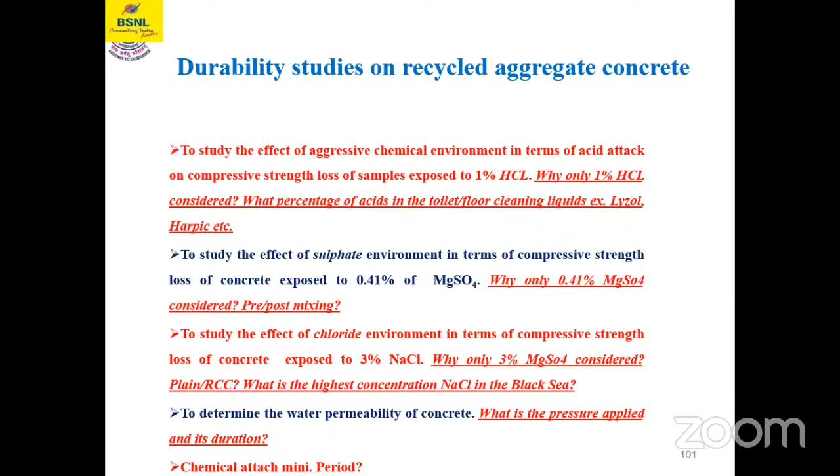Sir, this is my recommendation to faculty members. As per my past experience in the field of industry and academics, the following recommendations and suggestions are made to the faculty members and the management. BTech or MTech projects may be simple and may fulfill the needs of the industry. A monthly lecture, seminar or internship may be arranged for BTech students from the first year of BTech itself. For BTech or MTech projects, external guides may be attached from the industry for better understanding of theoretical knowledge in the field.

So one chapter on cost benefit analysis may be added in the BTech or MTech project. This is what I observed. Because this is the faculty development program, this is my suggestion: kindly add one chapter for cost benefit analysis.